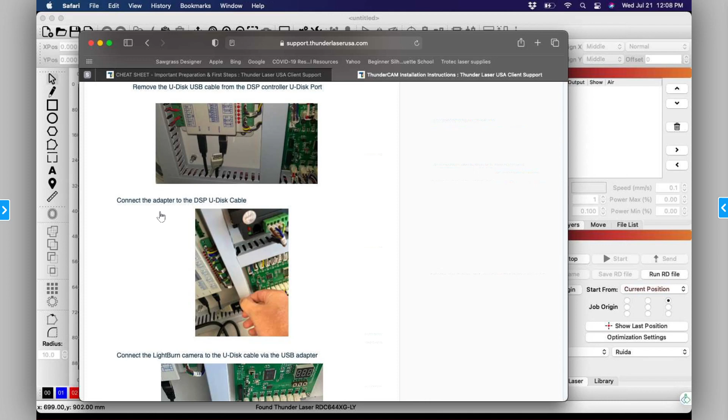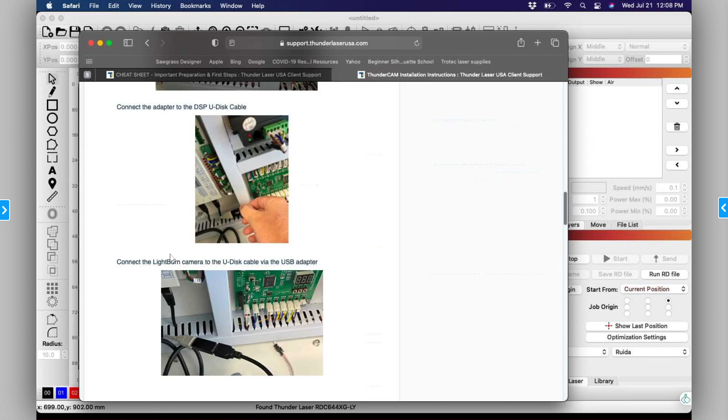So what we came up with was to unhook the U-Disk port, because most people don't use the U-Disk in most applications. So basically what you've got is the other end of that connector that's at the power cord right here. We put a gender changer on it and plug the camera into it. So in effect we've allowed the camera to come out of this USB port, and then we have this adapter to go from that port to the computer. And that's so you don't have to drill a hole.

Now, here's another option: take an Allen wrench and unscrew these two screws, let that connector fall down in there, and just push your cord out the hole.

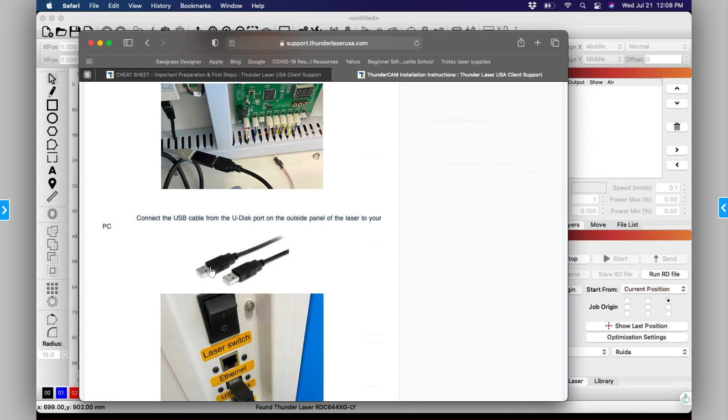Every time you add an adapter or a splitter or anything like that, you're adding noise and resistance to all of those connections. The more terminations and connections you have, the weaker the link gets. So that's what I would do.

If I would just take this, you can put the screws back in it on the backside and just let it fall down. It won't hurt anything just to be on there. That'll leave this rectangular hole open for you to just push your camera cable right out that hole.

Does that make sense? Yeah. And that way you don't have all the adapters and stuff.

If you don't have the length that you need... do you have more than one USB port on your computer? Is that an issue that you only have one USB port to deal with? No, there's two. Okay.

It's best to run them separately so you can split that bandwidth up a little bit, because that 4K... well, that's not a 4K camera, I think it's about a 2K. I'm working on a 4K 13 megapixel. I've got one in my hand, and it's working with Lightburn, with three different lenses, so we're testing a high definition version of camera to go out sometime in the future.

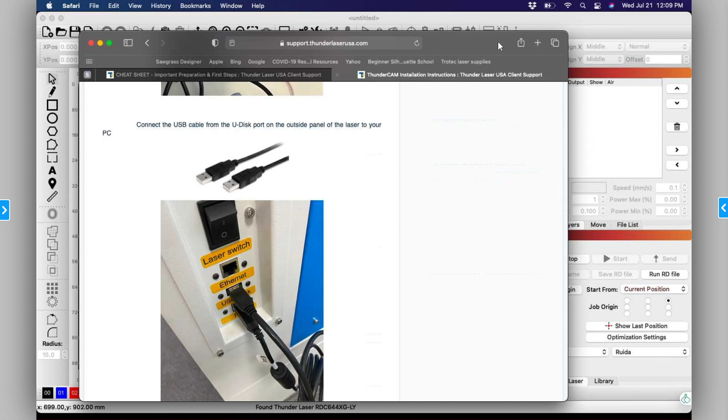And beyond that, you should be able to get a good signal after that.

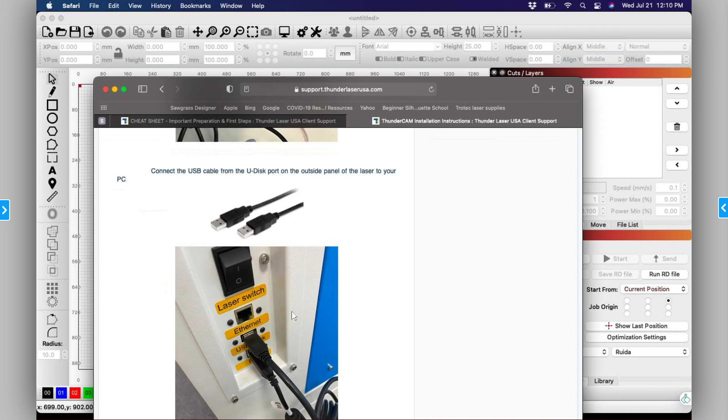And the simplified video, I don't know if you've watched it, this one, that's actually on a Nova 51. The only thing that's a little bit different, let me maximize this for just a minute, and I'm gonna play that and mute it. I'm just trying to find the part that has the visual that I want to display.

The hinge line is the problem on the Nova 51 because we say the camera has to see the entire bed, but from this angle, the camera cannot see the entire bed. Okay, yeah, I noticed that. Yeah, and so you just lose a little bit of it.

It doesn't make the camera non-functional, but you can't let that throw you off, because when we input the size of this bed, that's the size of the work area, and then wherever you compute that output, that's where it's going to show, and that's what it's going to calibrate to. So you just won't be able to visually align things back here, but the whole thing will still be accurate. So that shouldn't be too big of a problem.

If I plug my camera in directly to my computer, I can see it like on that preview, but that's all, I don't know how to use it.

Well, you got to calibrate it first, and that's what this video goes over. I can show you a few little tidbits in that real quick.

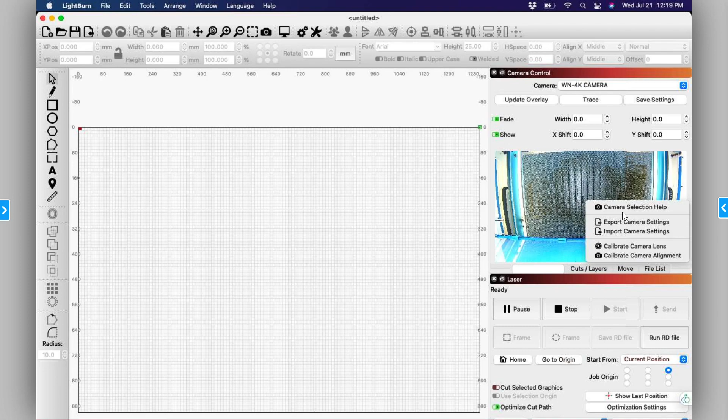Let me go back to this stuff real quick, and I'm going to leave this tab open. This is the simplified alignment that's done, and it goes through the entire thing. This talks about how the presets work, and we've already done your lens calibration and the preset. So when you go back over here, all you have to do is right click on this picture, and we already did this part, so you can go right back to that alignment section where you select the camera, and then it's ready to output that pattern.

And let's see, let's go back over there.

The basics of focus is something that would be, this is some older stuff about it. If you haven't seen the basics of focus video, the second one, I would highly recommend it, because if you want to, for instance, use the camera on a piece of half inch ply but you want to cut it, and you know that you only want your stock 2 inch nozzle to be 2 millimeters from the surface because you want to focus into it, that adds another variable to the thing.

So the way I would do that, if I wanted to cut something thick and knew I wanted to focus into the material and not maintain focus on the surface, is I would autofocus the material, and now it's set for the camera. Then you can manually adjust your lens, your head assembly, to manually focus into the material by bringing it closer, and then just tighten the knob back up. Always remember when you're done to put the nozzle back up in its full stop up position, so you don't have any head crashes.

The first video talks about focus in general, and about how it affects thickness of materials and how you can get better cuts. The second video talks about how our autofocus system plays so well with the camera. So this is some really good stuff here.

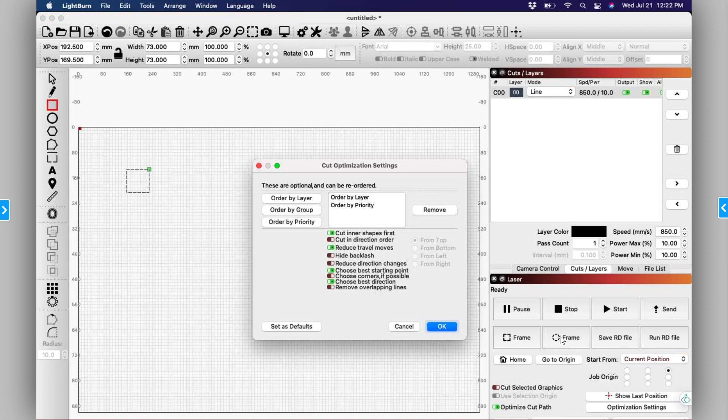Go over here to optimization settings and turn on remove overlapping lines. We can demonstrate that real quick. Let me make a real quick example, we'll just do 4 and make the spacings 0. There we go. And we can look at it in the preview and see what it does. Let me speed it up a little. There we go.

Yep, yeah, so that should fix it. Looks like you have an artifact down there in the bottom. I might have done that by accident. Looks like it's right there.

Yeah, because drawing squares, I always hate that, you have to go back up to the selection. Now did you notice, I don't know if Silhouette or any of the other ones have it, when you drag from left to right you get a blue bounding box, and when you drag from right to left you get a green one. Have you seen that? I found that out a couple days ago. That was awesome. So you don't have to be so precise, you can be a little sloppy and still just grab that inside one. That's pretty cool.

So okay, let's get rid of that. But yeah, that's where you do that, is in the optimization settings. I guess you could leave it on. I don't see any reason why you'd ever need to turn it off.

Now some of these things you have to turn off, like hide backlash, because when you do, you notice it toggles a bunch of stuff off and grays it out where you can't do anything. So it minimizes the optimizations. What that's for, there's an article about that. You usually leave it off anyway. I'll leave that, if it sounds like this is something that you do, so I'm going to leave that on.

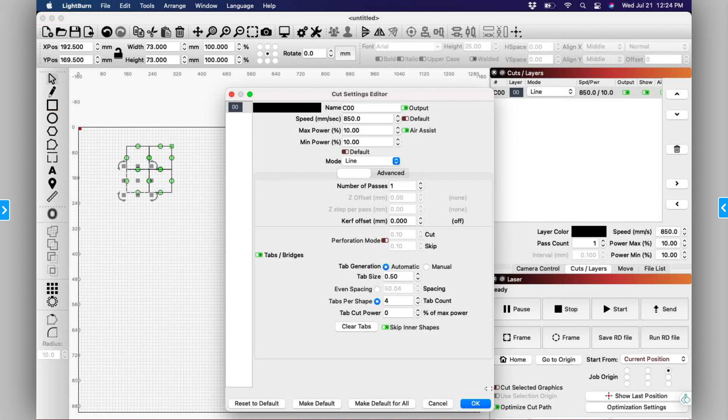And then if we go into our preview and look real close, there we go. See, there's a little place that it leaves behind, so that you could flat pack it like that, and then the client can pop it out when they get home.

Typically they're not overlapping, in this instance I think. Typically if I was going to do something like that, like Monopoly tiles or something like that, I would have a couple of millimeters in between, and that way it would just snap out, and then the skeleton would remain. I've seen people engrave the instructions on their website and stuff, or 1, 2, 3, insert tab A to B, and things like that around the wasted material, and then just stick it in a padded envelope and send it, and all the pieces are still intact. So like balsa airplanes and things like that, there's people that cut those out and they'll let them stay in there so that they stay one piece. So that's kind of neat.

And there's perforation mode also. Some people use this to get a faux stitching look. Like if they're doing a leather patch and they glue it on, but they want it to look stitched, they'll create this pattern so that they can create a stitch pattern, and you can define how long the line is and how far the gaps are in the settings, to get it to your liking.

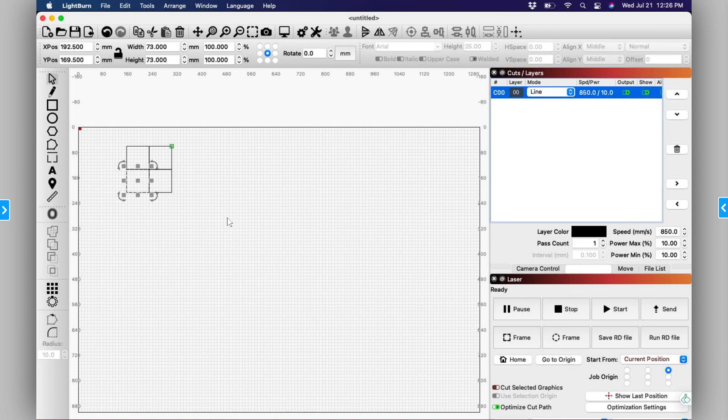And defocusing will make it thicker. It turns the beam from a pencil tip to a sharpie, kind of, as you focus and defocus. That basics of focus video goes a little more into that, so you can change your output by defocusing a little bit, and make it look a little more natural, and things like that. But that's just something you'd have to dial in. I'm going to turn, yeah, there's the cut and there's the skip, so it's fully adjustable.

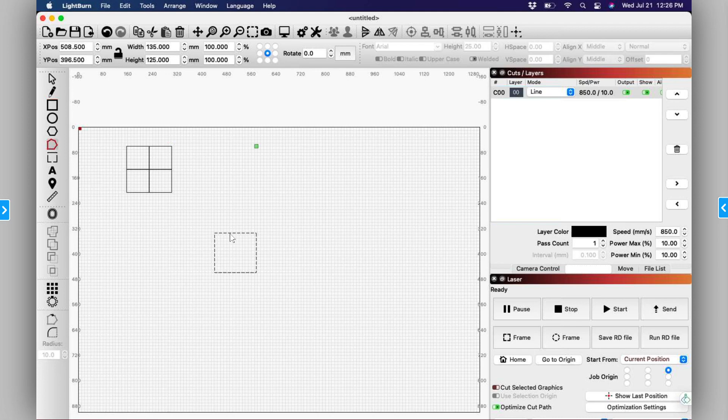Okay, let's see. Now as far as the node editing, let me see if I might have to break this apart first, because this was made with a creation tool, same way with the text, so that the text in the boxes and whatever's designed can remain editable, where you can change, do all the stuff. You have to sometimes go in here and convert it to a path, kind of like text on the SVGs in a lot of the vector software.

You have to convert that to a path, or it won't output with the rest of it. So we're going to convert that to a path, and then we should be able to go into node editing.

Now you've got your nodes. Let's say we wanted to add one in the middle. I could hover here and hit the M key, and it would add one at midpoint. Or I could go anywhere and hit I to insert another node. Let me zoom in this way.

If I wanted to break it, I could just click B, and that would break it apart. Then you can delete, trim, and extend. You could insert and then hit S to make it smooth, and that way you'll get your drag handles and can make arcs and things like that. It's pretty cool, there's a lot of neat stuff in here.

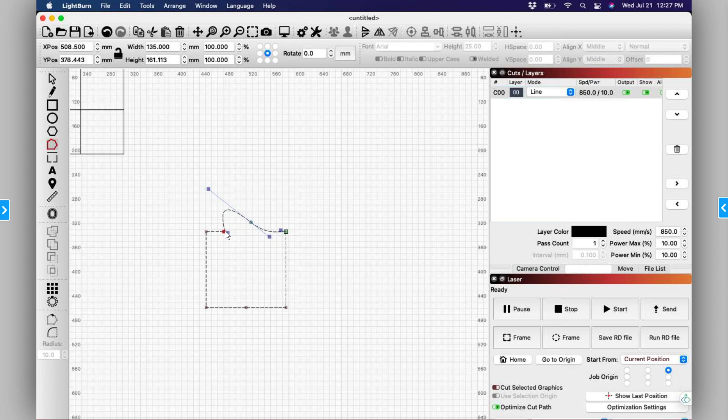And just touch them. Oh, okay. Yeah, right, so yeah, it does.

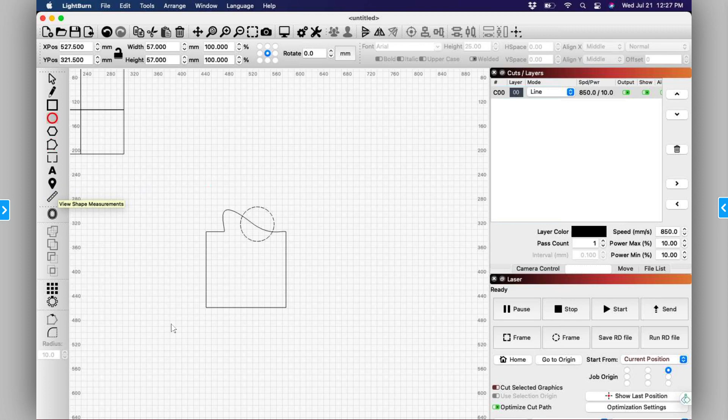And then of course all the regular Boolean stuff, like this. If you hold shift, it'll maintain the aspect ratio and you'll have a perfect circle or square, whatever. If you don't hold shift, you can skew it how you like. But I'm going to do that, and we'll select both of those, and then we can weld those together real quick.

So yeah, it's got a full host of the normal stuff that you see in most vector programs, but I love the node editing in this once you figure it out. And you can't do it on a Mac—I haven't figured it out—but I'm going to hover over this.

If you had a Windows keyboard, this would work: hit the F1 key and it'll bring up the documentation for that particular function. Well, it should.

Maybe it did. Are you running multiple monitors? Let me check... let me click it again. F1 should bring up the documentation.

Well, anyway, here it is. Also, the online documentation is right here, and you could just go and look for node editing, and there's a bunch of hotkeys in here—smooth, convert to line, delete, insert node point, midpoints, break, trim, and extend. So a bunch of cool stuff in there.

Their documentation is incredible.

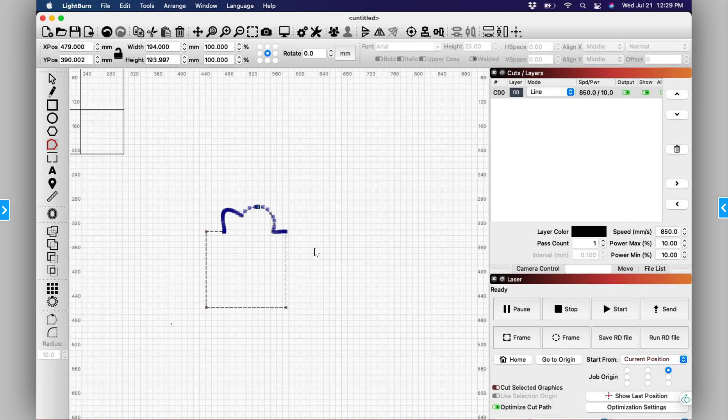Is there any other thing that you can think of that you had questions about?

Oh, when I have it on high flow, sometimes when I'm cutting it still goes to low flow. Gotcha.

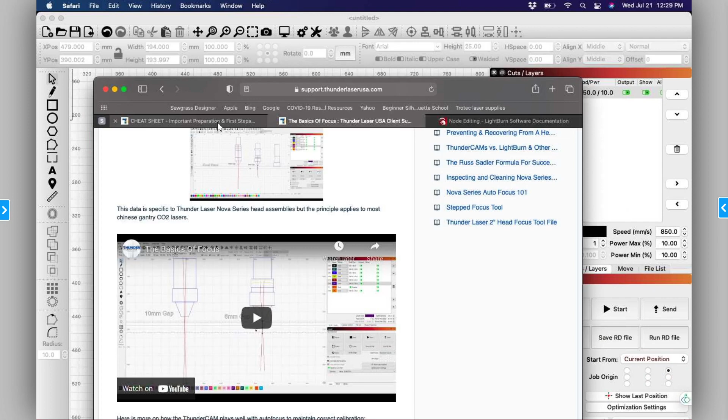Why is that... where is it? There it is. There's a sequencing issue, and number three here seems to be the fix.

This is what everybody's doing: use Send or Shift Send instead of Start, and I'll explain that. When you hit Start, it streams it over to the machine, little piece at a time, and there's no error checking, there are no checksums, there's nothing. So it basically just spews the data at the machine and hopes for the best.

That's why USB communications are so goofy sometimes. Now, the reason this happens isn't a bug in Lightburn or a bug in the Thunder machine, but Lightburn has to work for 99% of all the Chinese lasers out there, not just Thunder. And 99% of those lasers don't have a dual stage air assist, the TL timer board, the maintenance board, and all these proprietary systems that are more advanced. So we've gotten it to work, but there are a few caveats.

For instance, on the rotary, most of the other lasers use the Y-axis for the rotary, and we use the U channel. So a lot of people have to turn their rotary on and off in Lightburn—if they don't, it'll mess something up. Ours is hot swappable: when you plug it in, Lightburn knows it's on, and when you unplug it, Lightburn knows it's off.

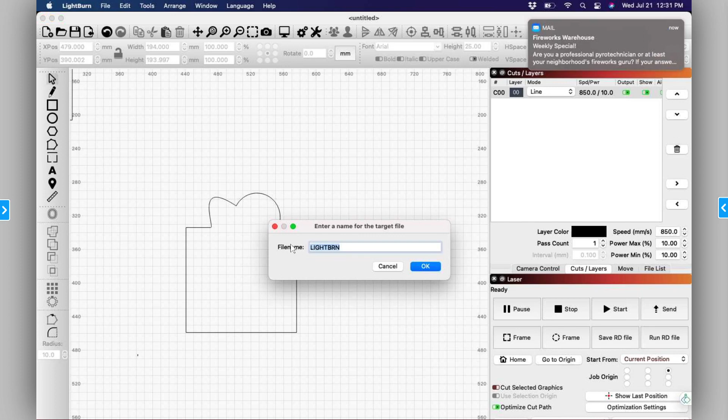So by using send, what happens is, I'll show you, you'll get a thing. I don't pay any attention to this because the way I use Lightburn is I use send just like start, so I don't care what it's called. If you already have the file named, it'll use the first 8 letters of the file name so you can differentiate. You can rename it if you want, but I'm just going to leave it Lightburn.

So it just sent that entire file in one packet over to the internal memory of the machine, and it will not fail now. Now here's the problem — you notice the machine didn't turn on and do anything. So in that instance, you'd have to go over to the machine, hit the file button, highlight that file, press enter to bring it up to the main screen, and then press start. You may have already done it that way too.

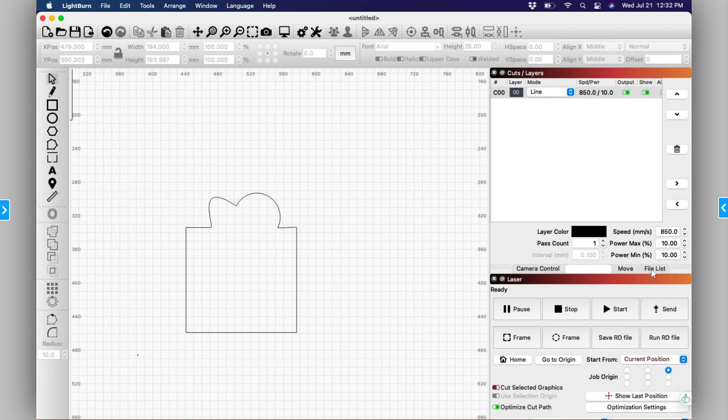Thing with sending it — if I needed to go back and recut a section, like start from here, can I still do that? You can. Let's say you outputted this and you needed to redo this one again — all you need to do is turn on cut selected graphics and use selection origin, then choose the circle. If you look, the only thing that's going to be outputted is the circle. So you just send the job again, and it'll ignore this outside part because you don't have it selected. So you can selectively pick what you want to output and what you don't.

Now, here's another way — you could just make this a different color and then turn the layer off. You can choose whether the layers are outputted or not here.

At that point, would you just send it, press start, or would you send it again? I would send it. I always use send. As a matter of fact, there's a place in the software to remove this button altogether, so now there's a happy medium.

If you go over to the file list, you'll notice there's nothing there, and that's because it doesn't refresh in real time. So we're going to have to hit refresh. And there's the one that I just did.

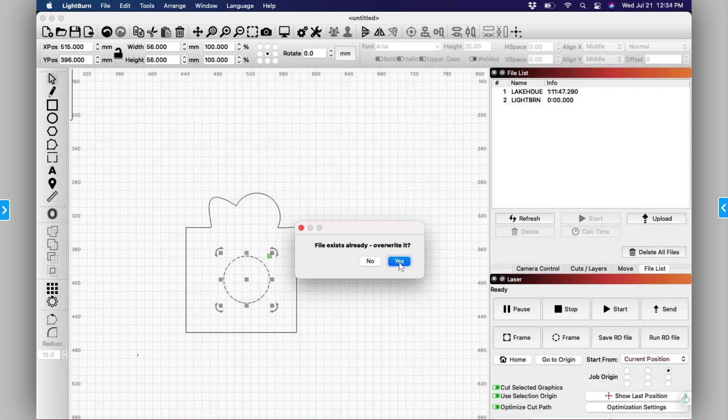So what I'm going to do is — oh, I had to go in here and make a settings change, or I forgot to put the circle on. So let's do this: cut selected graphics, use selection origin, that's all we're going to output. That's what we want. So I'm just going to send it again, and it's going to be the same name, but who cares. It's going to say it already exists, you want to override it, and I'm going to override it, and then I just go run the job. Now, here's the cool thing.

If you hold down the shift key when you hit send, it'll go through the same thing with the windows popping up and you naming stuff or overriding or whatever. But as soon as you hit OK and that process is done, it'll send the entire file over in one chunk to the controller's memory, and the machine will kick on autonomously just like it does when you hit start. So you don't have to walk over to the machine and initiate the job. That's what everybody uses, shift send, because it behaves like start, with the exception that you have to answer a few questions.

So what about when you get up to 100 and then you have to go and clear it all out? Well, it's a good idea to keep this clean anyway. If it's something you use every day or every week, that's fine. But you can go in here and refresh — be sure and refresh every time. If you don't use that one, you can delete it, or you can just hit delete all and clear the memory completely out. I won't do that because I don't know if you want to keep that job in there. It looks like a pretty good sized job, so I'll leave it. But yeah, you can manage your thing from here.

So I can just delete from there instead of having to push all those buttons. Exactly, exactly. Yeah, that's why they made the easy button right there.

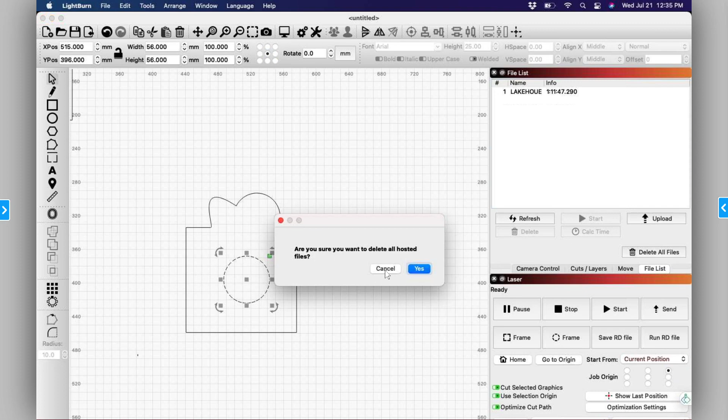So when I'm engraving a bunch of ornaments, to engrave faster, I want it to engrave each one individually, instead of going all the way across. How do I do that? Okay, so in that instance, let me just duplicate this.

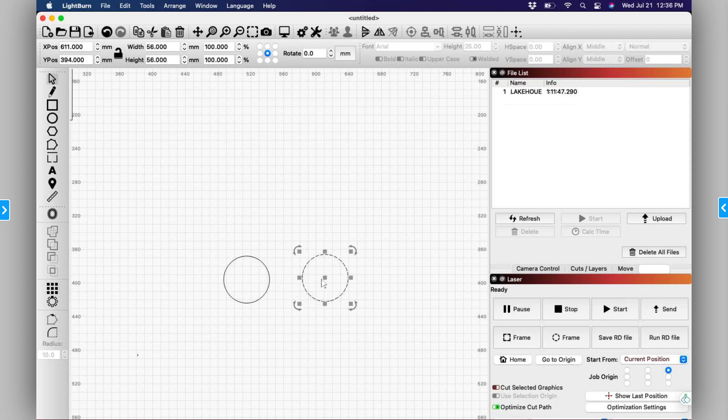And once more - I could have made an array, but this works for what we're showing. So let's go into the cuts layers, make sure these are fills for this application, and let's look at it in the preview to see what it's going to do right now. Whoops, let's get rid of that square.

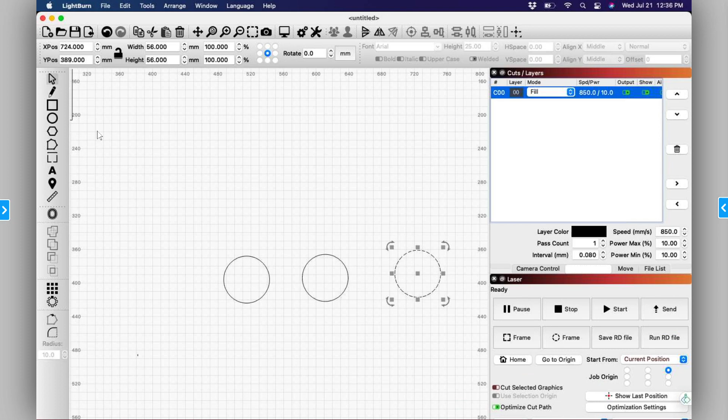Let me go back out to extents. There we go, we'll lose these. That's better. So I'm going to turn the traversal moves on.

And right now it's doing probably what you don't want - it's going to scan that entire space back and forth, and that can take a while because there's a lot of white space there. So in that instance, there's a couple of options.

You could, if you had multiple objects, group them together. For instance, if you group these two together, it would do this one by itself, and then it would do these two if you go into your settings. You see there's fill all shapes at once, which is the way it is now, fill groups together - and then you can group things as you like them - or fill individually.

In this particular instance, I would choose fill individually. And now there are almost no traversal moves. It's going to do this one, then move over, do this one, and we'll look - it's 4 minutes and 41 seconds on something this small and close together.

Probably won't matter, but on something big it can make a huge difference in time. So this is 4 minutes and 41 seconds. Or is that 4 hours and 41 minutes? I don't know - yeah, I think it's 4 minutes.

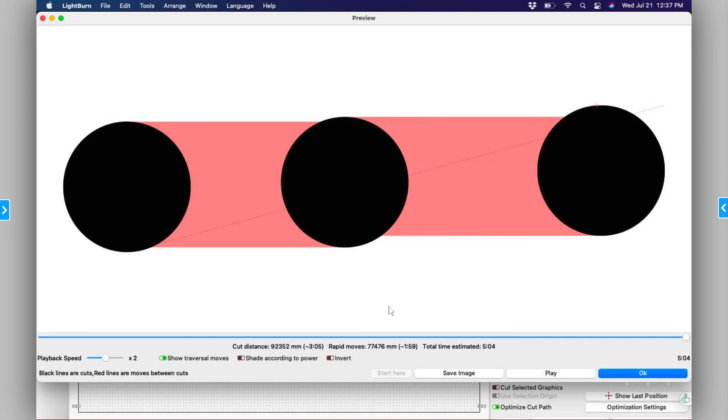So let's do fill all at once and see what happens. Okay, it's an extra minute, but that's also a lot - I mean, a minute's a minute. You do this five times, you know. So, that's how you can choose how stuff gets done.

And sometimes, like if it's text, you would not want this turned on, because it would go insane going to the next one if it's really small stuff. This stuff is better on large.

So that meant like if I'm doing each ornament at a time, I would do fill groups together - I would group all the stuff in each ornament. Yes, exactly. And if you're going to make one and then replicate it with the array tool, just group it before you do the array, and that way you'll have a bunch of grouped items already - you won't have to go back and regroup them individually. So yeah, that's exactly how that would work.

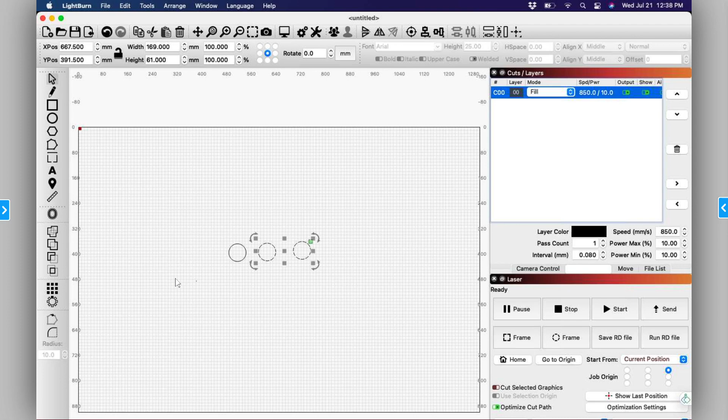Do you have one of the ornaments? We could pull it in and have a look, or actually look at one of your files if you'd like. I don't have one ready right now. Okay, I do have - since I've never done a picture, and I've had a picture I've wanted to do for a while and haven't done it. I've never done a picture. Well, yeah, we can. Let's do it. I'm horrible at pictures, and I've been working with

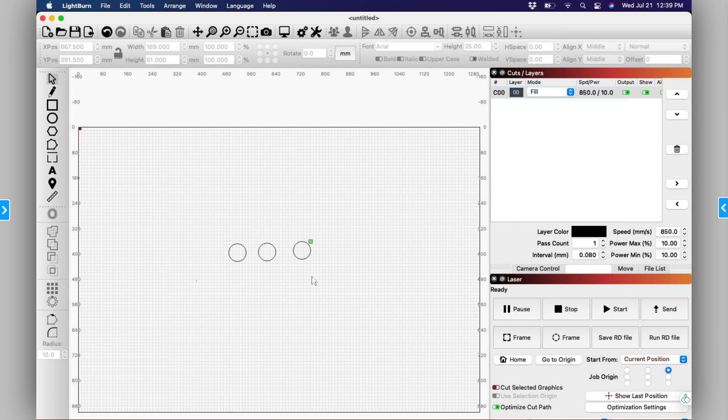the guy in England, Russ Sadler. He's been giving me some pointers, but the stuff he's doing is dot to dot, a little bit more complex. So you can drag a picture in if you want, and we can have a look at some of the tools. I can't guarantee I'll get it manipulated so you'll have the result and output you wish, but I'll definitely give it a shot, and I can show you what some of the things do.

I brought one to Lightburn. Okay, so yeah, just pop it in, open it.

I'm in a little different boat than most people. Most everybody that has a laser has it because they want to make stuff like this, and they need it as a tool to help with their design and inspiration in making things they already have an idea about. I got into lasers because it's motors, wires, and switches, and I came from a vertical market pretty similar to the CNC stuff. So I don't have any design skills - if I had to make cutting boards and cups to make a living, I would starve. My expertise in this realm is rather narrow.

So that's a good place for this kind of stuff for the photos. There's a bunch of stuff on the global groups about it, and we still haven't - there's no one size fits all thing. It's basically you just gotta learn it, but it can be kind of crazy.

But I can show you about the features. One of the things you got to remember is if you bring in a 1200 DPI image, that doesn't mean you need to set the output at 1200 DPI, because the laser beam can't get that small. All you'll be doing, if your settings aren't right, is the beam goes over everything twice and it just wrecks everything.

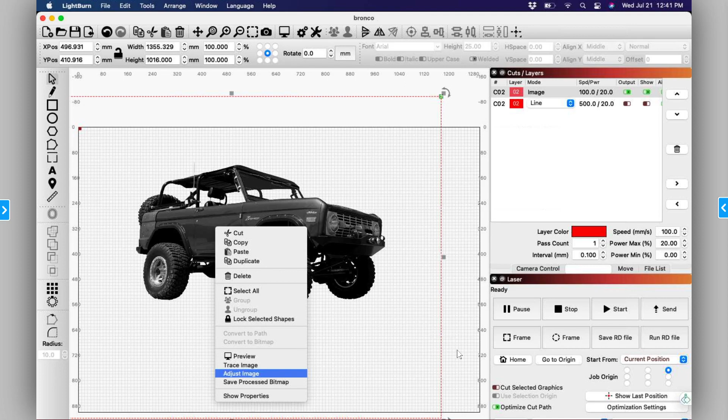All right, this is a good image. So we're just gonna click on it, and go to adjust image, and that's going to take a little bit of computing power. Maybe we make it smaller for a minute. Did we lock up, or is my internet having some latency issues? It looks like it's thinking. Okay, I got it - let's get it a little bit smaller to work with.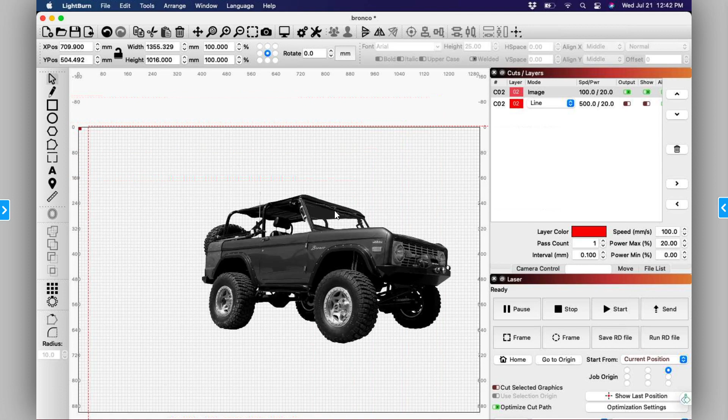I also have a question on etching the metal - is there something I can use to etch color? Yes, well, like Enduramark and these guys, they also make some - Enduramark does like gold and silver and stuff like that, white. They even make some for glass, so you can do black on glass.

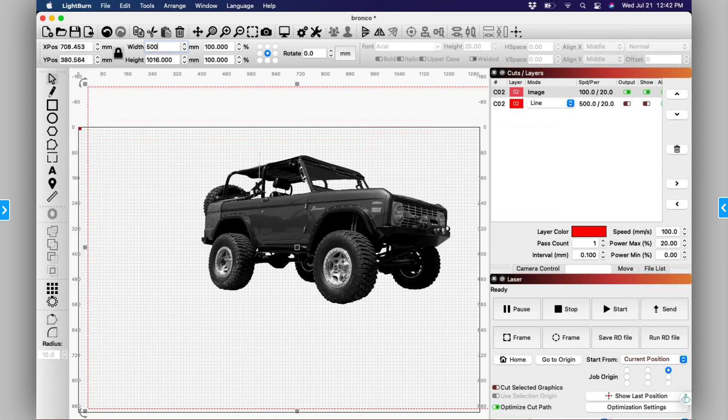Let me lock this aspect ratio and get this to something more manageable for now. Yeah, okay, that'll help with the computing power, I believe. We could apply a mask, but it's seeing that alpha channel and interpreting it correctly, so I don't think we need to mask it. Yeah, here we go, this is better.

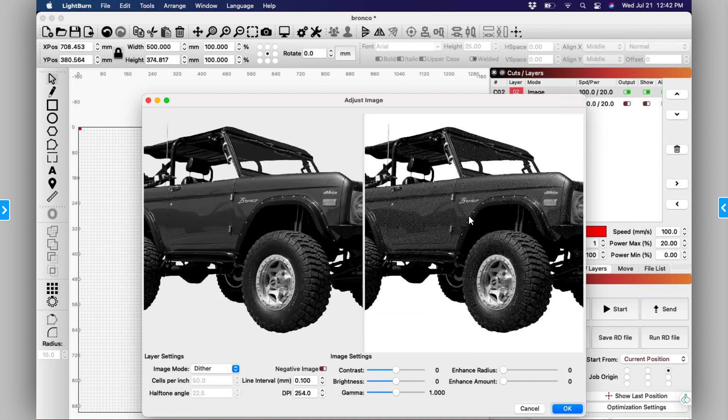Okay, so this is a black and white image. If you do grayscale, it's gonna literally - I think I'm zooming the wrong way. There you go, so you can get in here and really see what's happening.

Now, as you change your DPI, this is a little high. For the stock 2-inch lens, usually about 0.08, but on an image you may actually want it different. You see how things are changing? As you change your line interval, you can see this in real time.

Now we're dithering, and I think you'd probably want to use Stucki or Jarvis for this. As you click the different ones, you can actually see what the differences are.

Now, you also have - this is basically unsharp mask or sharpen in Photoshop. They always want you to sharpen it. So this is the unsharp mask, and you can define the enhance radius and the level, and that way you can make changes.

It's not as evident in here - oh, I'm really screwing with stuff because it's taken a little bit to think. Let me slow down a little and let it do its thing. But you can kind of see what it's doing.

As far as what this needs, usually you want a little bit higher contrast and a little bit higher brightness, and you want to add a little bit of enhance radius or sharpening. Then you can zoom back out - I always forget which way to zoom on a Mac because it's backwards than all the others. There we go, no, I was going to the right place.

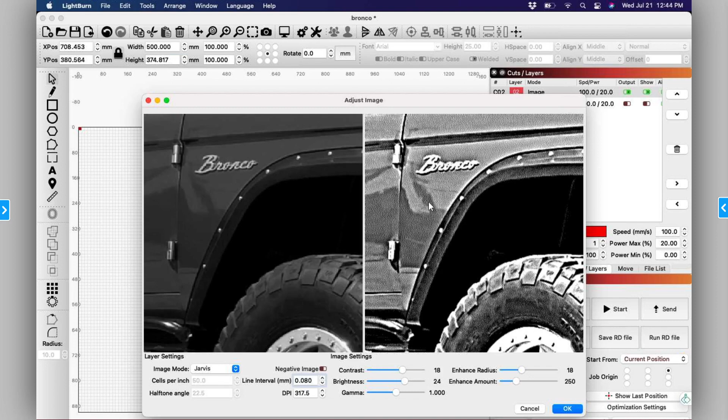There's also some software that'll help with it. Now, see, that looks pretty big - this looks more like what you're after. As you zoom out, you'll notice as you move your enhance radius and amount, you can really affect it. What you want is that almost overblown look, but you don't want to lose the detail - you don't want it to blend.

You want to get bright and enough contrast where you can see the detail in areas like this where there's low contrast. And then you could take a look and see how Stucki would look, for instance. A lot of people use Stucki.

At the end of the day, when you're using any of these dithering modes, you're just laying down dots, so power doesn't matter. You just want it to be the contrast you want, because it's either going to lay a black dot or a white dot.

Now if you're doing grayscale, that's a whole other thing, and that's the hardest one to use. This actually varies the power with the grayscale brightness, so white would be 0% and black would be 100%. This is how you do 3D relief engraving also, using a grayscale depth map created from an STL file.

So grayscale is pretty difficult to use. I would start off using some of these dithering modes. I would try Stucki and Jarvis - those seem to be the go-tos for these higher resolution images.

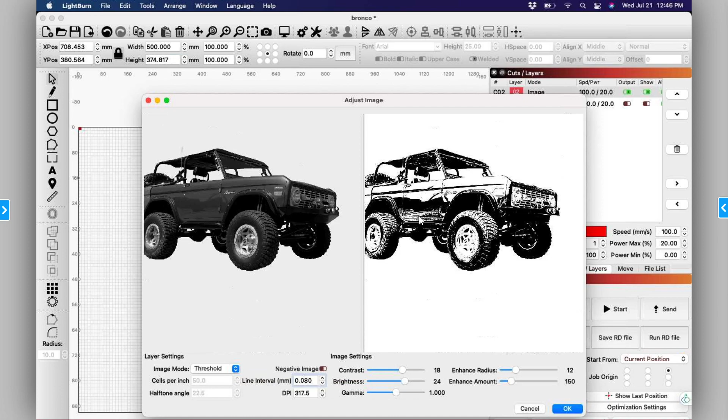So depending on what mode you want, but you definitely want to lighten it up, and look how well it pulls out this fine detail right there. That's kind of crazy, I don't... let me pull in a little bit closer. I don't know, that may just be artifacts.

But then again, you can adjust, and you may want to pull your DPI down a little. Now if you get your line interval too low, it's going to be tinier than the width of the beam, and it's kind of like mowing over the same spot twice - they'll overlap. It depends on the material - a piece of pine is not going to hold 800 lines per inch anyway, just because of the uneven density between the fibers, the soft wood and hardwood, and the grains in it.

So if you want to get the highest quality output on images, people are doing it on painted ceramic tile, anodized aluminum, acrylics - things like that - to really get this stuff out. So if you're going to put an image on wood, it doesn't have to be super tuned in and super high resolution - that can actually be going against you. So it goes against conventional wisdom to say I have a 1200 DPI image, but it's only going to output at, you know, 300 - how in the world could that look good?

And that's actually what Russ was teaching me about. And if you want to jump down a rabbit hole, I'll show you a rabbit hole, and I'm also going to show you first...

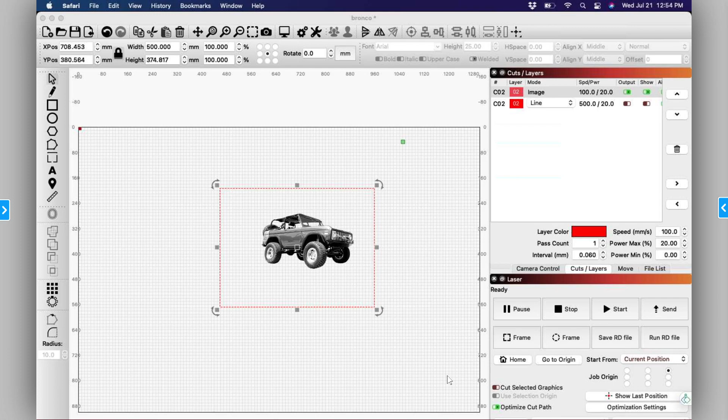Is there some kind of fan controller that Lightburn can control as well, or is it just a manual on and off thing? The fan is Cloudline - you know how you have to tap it to get all the way up to high speed? So I'm wanting a way to just hit it once and it's all the way on high speed. So are you turning your fan on manually right now? Yes.

Well, hang on just a minute. I've got a solution for you. The machine needs to control your fan, because the machine keeps the fan on for 15 or 20 seconds after the job is done and then shuts itself off, to eliminate any of the extra smoke.

So here's the thing - let's say you're using aftermarket inline fans, and you've got a Cloudline. So all you need at the bottom of this article is a link. You need this right here, it's like $6, you can get it next day. Plug that into where the old fan went on the laser, and plug your Cloudline in here, and then the machine will turn it on and off. Just leave it on high, and the machine will turn it off and on - it'll stay on high, and it'll be on that every time.

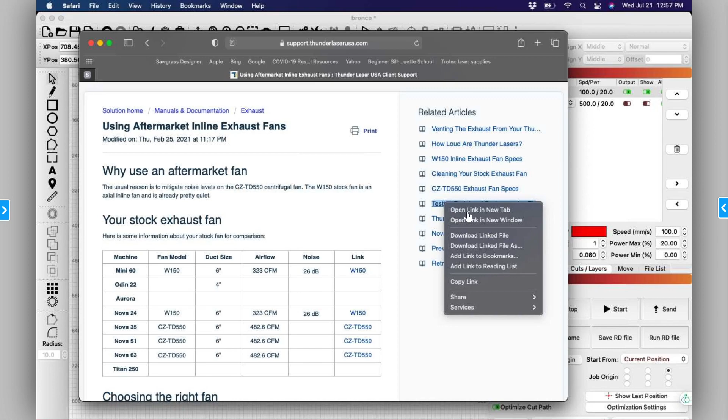Let me right click on here and open this in a new tab. The TL timer board inside the machine allows you to test and adjust the time for how long the components stay on after the machine's done, and some things like that. But there's a switch right here, and if you turn that switch on, it's going to turn on three things: it's going to turn on the exhaust, which is channel 3, the high stage air, which is 4, and the low stage air, which is 5. So when you flip that switch, both of your green air lights are going to come on at the same time - it activates both relays, and turns on the exhaust fan.

So what you can do is just flip that switch and then take a broom and knock that stuff off, and it should just suck it right out. That's how I clean mine - I let the fan run while I'm dusting, that way it'll evacuate the dust and it doesn't just get back into the room.

As far as getting back there and cleaning it, you just have to climb that hurdle however you can. You could probably lay a piece of plywood or cardboard across the honeycomb and kind of lay over there if you wanted to. I know that's not ideal, but it's kind of like crawling under the car to change the oil. It's a pain, but sometimes you got to get in there and do it.

I think that's about it. You're leaps and bounds ahead of a lot of people, because a big majority of our people have never even touched a laser before.

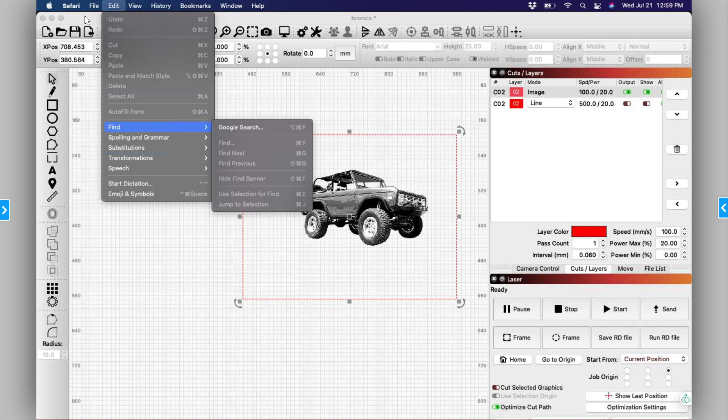So on the rotary, it'll be plugged in, and we've got some documentation on how to set it up, and a workflow on how from start to finish, creating a job and sending it over and everything. Let me get back to it.

Machine settings, I guess it's in tools. Yeah, rotary setup. If you got the Rotoboss, you'll want the pick roller. Let's see, is it reading? Okay, so this is settings for the chuck. You want to start off at about 4400. There we go, that's better.

Do not ever hit the test button because it will act weird. That's one of those things I was saying, we use a different channel than everybody else does. If you hit test, your Y axis will start moving because most people's Y axis is unplugged at this point. That's how most of the other lasers work -- you have to unhook the Y axis motor and run the rotary with that signal. So ours is a lot superior, but it lends itself to little hiccups like this.

So the test button shouldn't be used, and also don't frame from LightBurn while the rotary is plugged in, because it'll do the same thing -- it'll try to use Y instead of spinning the rotary. It doesn't know to spin the A channel using frame and test, but it does the rest of the time.

The object diameter, of course, will be whatever your cup is. I'm thinking a 20 ounce is somewhere around 78 or 80 or 88 or 85, something like that -- so that'll be whatever your object diameter is. You'll notice the circumference will change automatically, it's automatically calculated. The roller diameter is the diameter of the drive wheels that are actually touching the material.

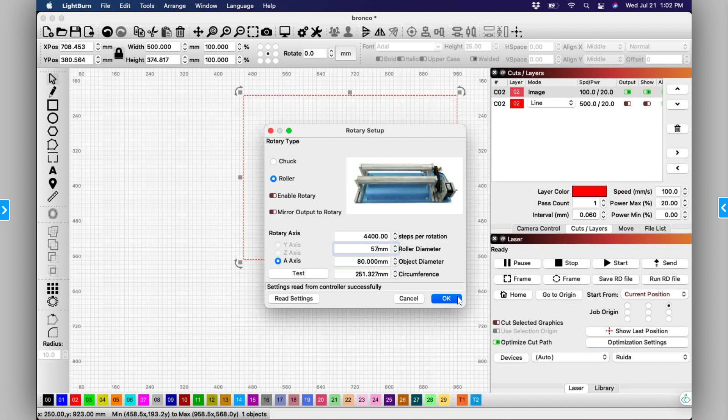So once I have that set up, I'm only ever gonna mess with the cup diameter, right? Typically, unless you do something like a growler that has a lip on it, and the lip that's touching the drive wheels is not the same diameter as the rest of the cup.

I mean, there are some things. I only do 20 ounce cups if I do them at all, and I only do them for one person because he had me do a few, now he won't let me stop. But cups, it's an ATM machine.

I figured it out yesterday. He got two boxes, there's 8 in each box. I charged him $20, but since you're my buddy, I'll do them for 15 each. So it's $120 a box, 15 bucks a piece. And I figured it out, it ended up being $180 an hour if I could continuously make those, because the workflow is so smooth.

It's incredible, I can do a cup in 2 minutes and 38 seconds. And then just stick it, if it's a bulk order of duplicates, multiples, 10 or 50 or 100 or 1,000 or whatever, you can really make some serious cash on those things.

Anyway, those videos are in there about the roller. It's on the cheat sheet. There's two - one for the setup, and one to actually walk you through doing a job.

And like I said, you can just type 'schedule' in the search for the solutions database, and you'll see the 1 hour and 30-minute calendar, the articles to get in there and sign up for those if you need some help. And of course, you can just shoot us an email.

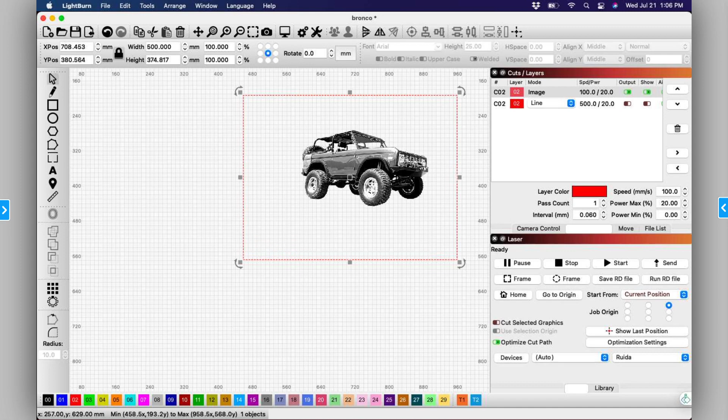Or we can even diagnose if there's maybe something unclear in a manual by going back and looking at the frequency of the same question, if it's repetitive, so that we know to go in and do something to help clarify things. So we constantly look at that stuff.